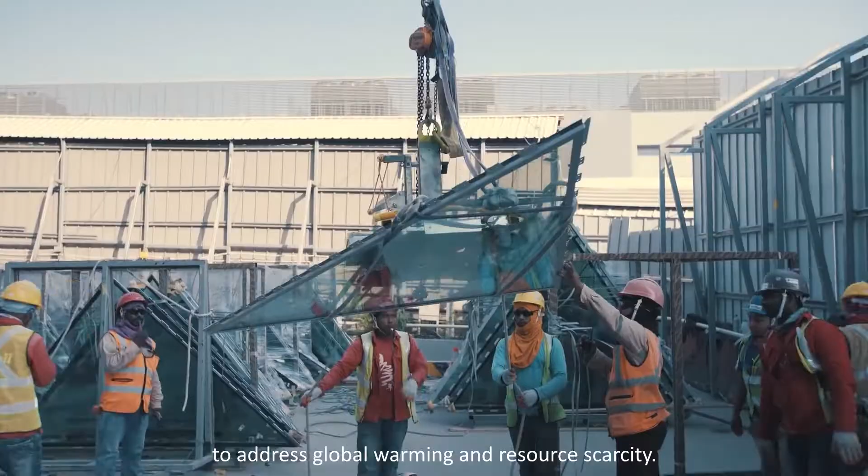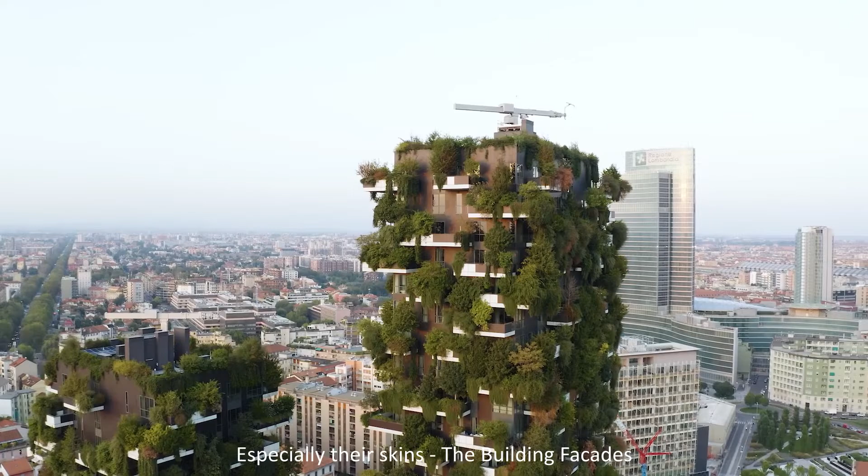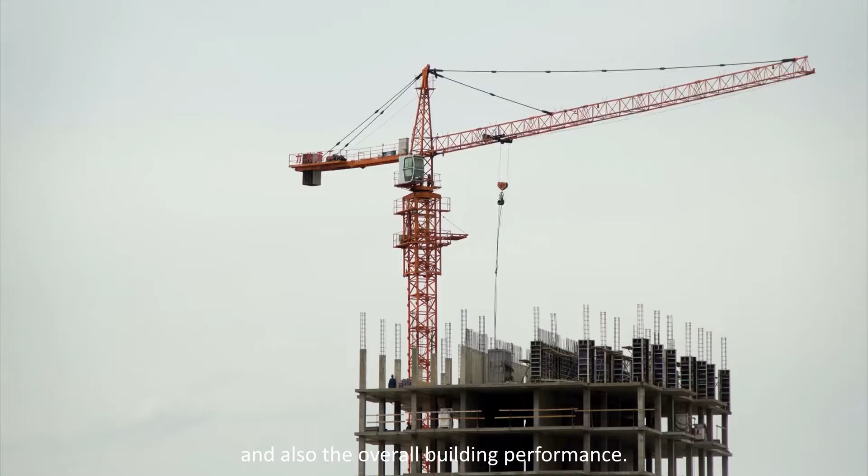Our societies need to actively strive for a sustainable future to address global warming and resource scarcity. Buildings play a crucial role in sustainable development, especially their skins, the building facades. Facades form the interface between the interior of the building and the outdoor environment. By having different materials, building orientations, shading devices, and advanced technologies, it helps optimizing indoor thermal comfort, and also the overall building performance.

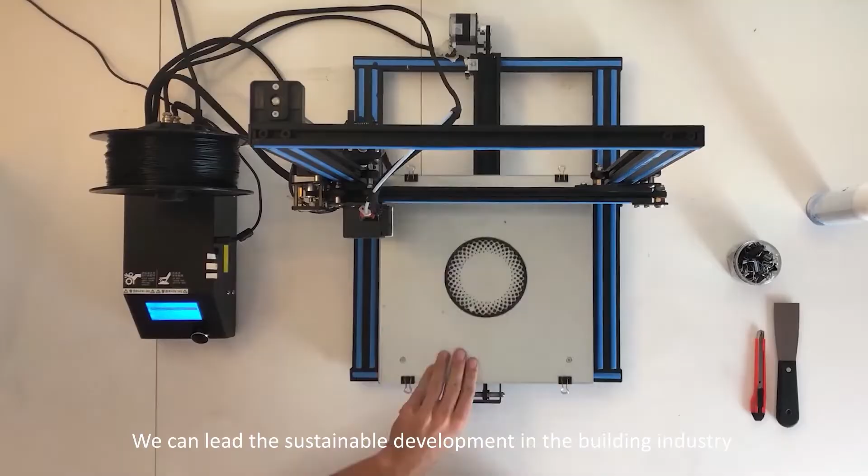Facade engineering is a new field of expertise that deals with climate and environmental challenges. We can lead the sustainable development in the building industry by using less energy and more adaptive facades, or even use facades to harvest energy. Now, let's talk about different shading systems in facade design. Advanced, of course. First, materials, glazing.

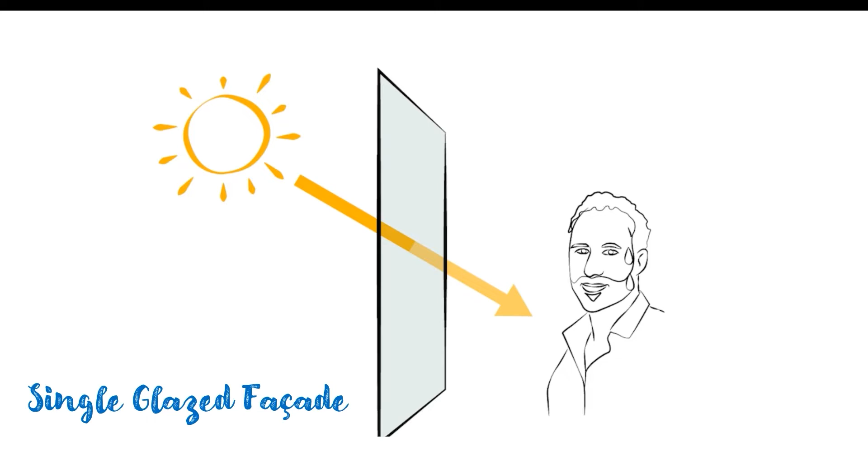In a single glazed facade, 90% of the light and heat energy from the sun passes through, overheating the interior. Mechanical ventilation and air conditioning increases CO2 emission. Glare is also an issue. It is estimated that the curtain wall market will continue to grow, so it is necessary to choose efficient glazing systems. But with so many different types of glasses nowadays, which one is the best? Don't worry. Just remember these three main parameters.

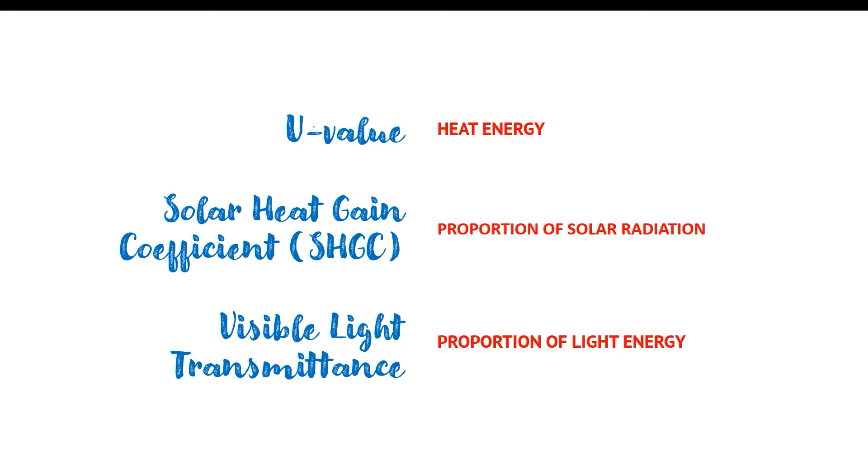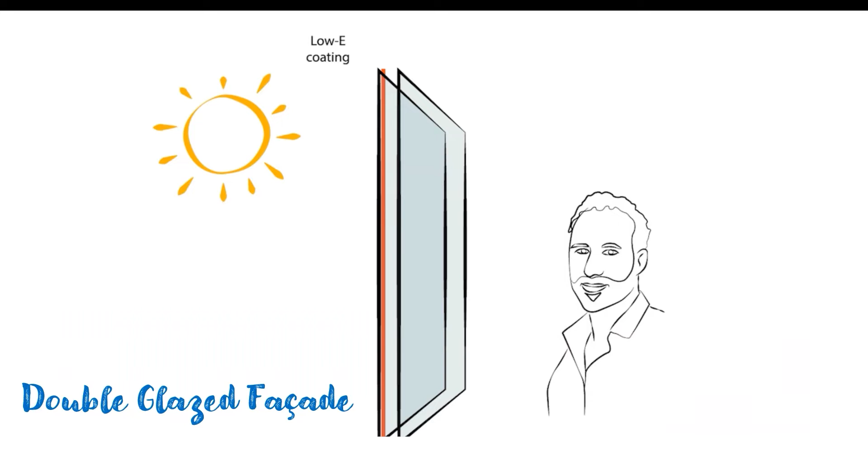Let's focus on number 3. Here are some terms you must know. U value, solar heat gain coefficient and visible light transmittance. These are their optimal values in a hot climate area. Double glazing consists of low E coating that reflects heat, reducing solar gain in a hot summer day. In winter, the inner coating keeps heat inside. The cavity in the middle can be filled with low conductive gas. A typical double glazing fulfills the optimal values.

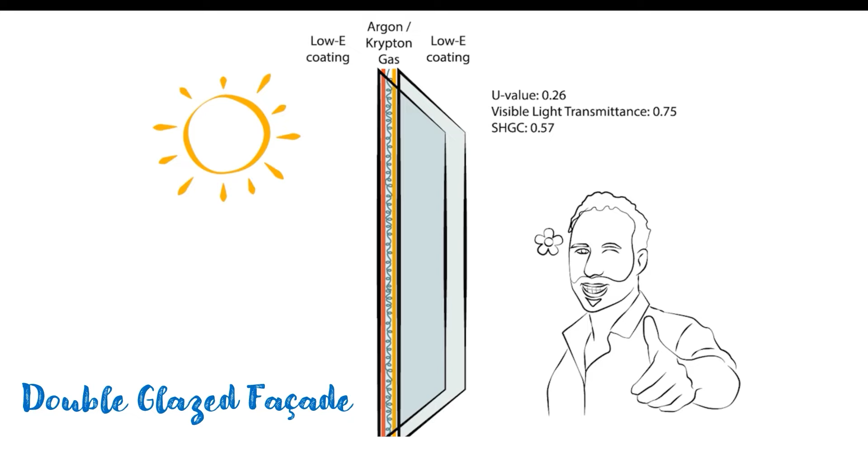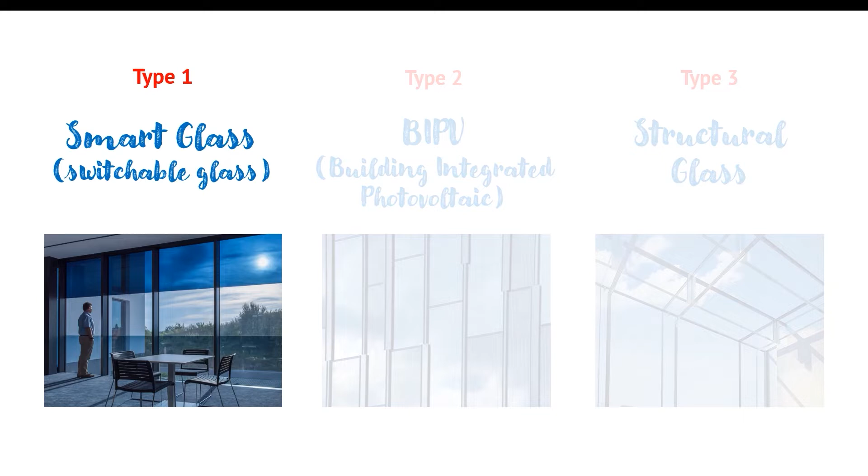Some new technologies include smart glass, which is switchable, BIPV, which acts as a transparent PV panel, and structural glass. 5 layers of ceramic materials are coated onto a thin piece of glass. Applying a small electrical charge causes lithium ions to transfer layers, making the glass tint. Reversing the polarity causes the glass to clear.

The Nestle headquarters office in Switzerland was renovated in 2018. Smart glass was used to block excessive heat and light at certain times, while allowing the office workers to enjoy the great view. To further improve the performance of glazing as a facade material, the future development will be the combination of these 3 trending glazing innovations.

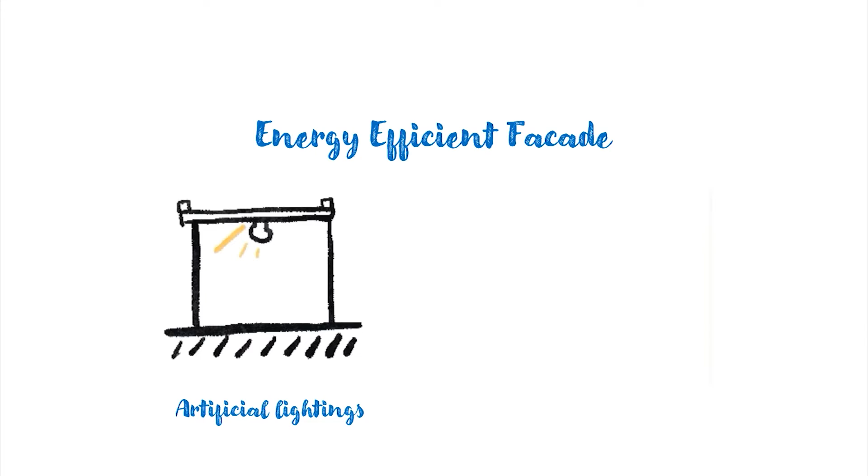An energy-efficient building facade can help reduce the reliance on artificial lighting and HVAC systems to create occupant comfort in the interior space. This can be achieved by reducing excessive solar gain and improved ventilation. In the past, thermal comfort solely relied on the thermal mass of heavyweight material such as concrete and brick walls. But in modern days, double-skin facades can be used to achieve high thermal comfort in lightweight building structures.

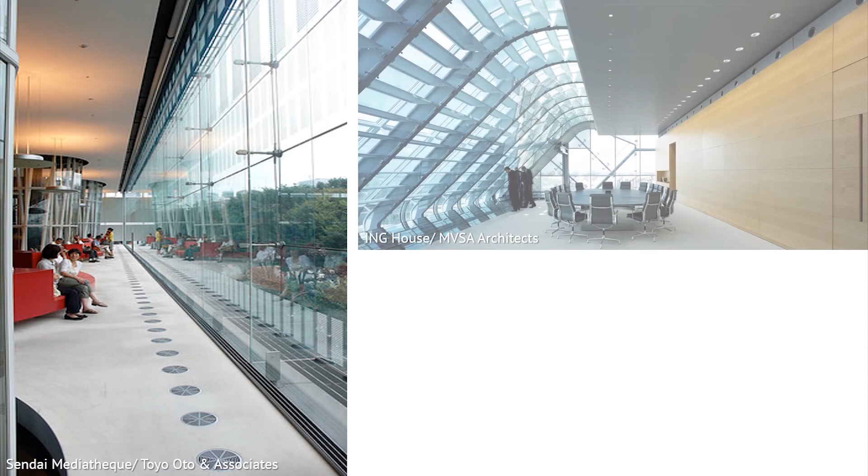Double-skin facade, short for DSF, literally means a facade system with 2 layers. Glass is usually used to allow sufficient natural illumination. The distance of this cavity ranges from 20 cm to a few meters. The air flows through this corridor, creates an insulation layer against extreme temperature, wind and noise, thus enhancing the building's thermal efficiency. The airflow can be both natural and mechanically driven and is applicable in different climates.

One of the most famous examples of this facade system is the Gherkin in London, UK. Designed by Foster and Partners, the building utilizes DSF to reduce its reliance on air conditioning and artificial lighting. Extensive use of glazing on the facade and light wells also enables natural lighting. The building uses only half of the energy consumption of similar-sized buildings. The tower is aerodynamically designed to reduce wind deflections and redirect wind into the facade system to facilitate natural ventilation.

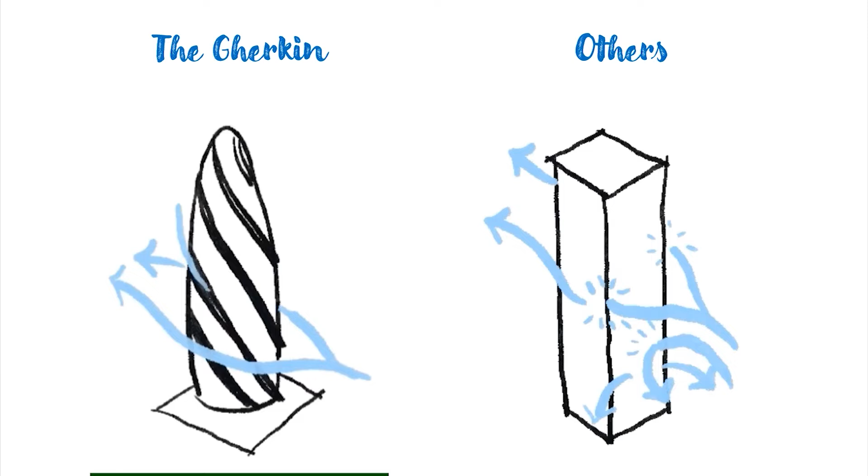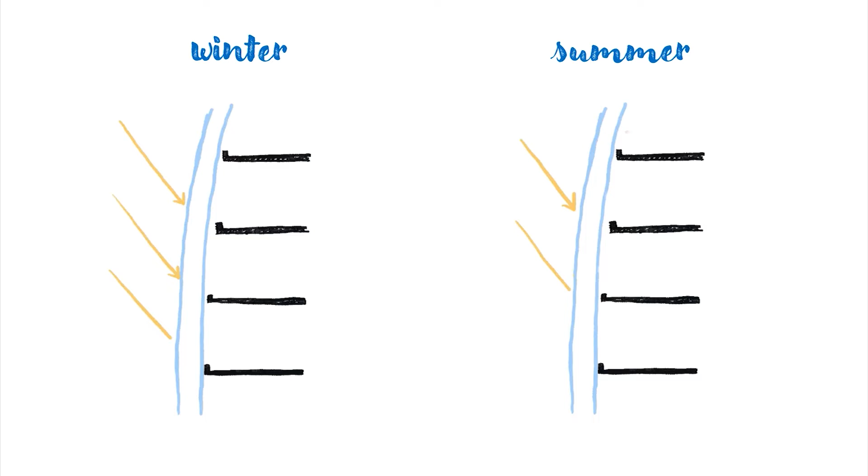The air between the double-skin facade insulates the office space through passive cooling and heating. Openable panels in the facade draw in fresh air. The air flows through the cavity and enters the office space through pressure differentials. In winter, the insulating effect keeps the building warm through passive solar energy. In summer, the outer curtain wall absorbs solar energy. Heated air rises through the cavity through stack effect and vents out of the building via openable windows.

The brise-soleil comes from the French word sunbreaker, that refers to the permanent shading technique ranged from simple concrete slabs and fins popularized by the Swiss architect Charles-Édouard Jeanneret, better known as Le Corbusier. There are 3 major types of brise-soleil.

The horizontal overhang works most effective in the southern orientation that protect the building when the sun reaches a highest level. Vertical fins work well on the east and west side in the morning and evening. The egg crates is a combination of horizontal and vertical elements that has a high shading ratio and is very efficient in tropical climates.

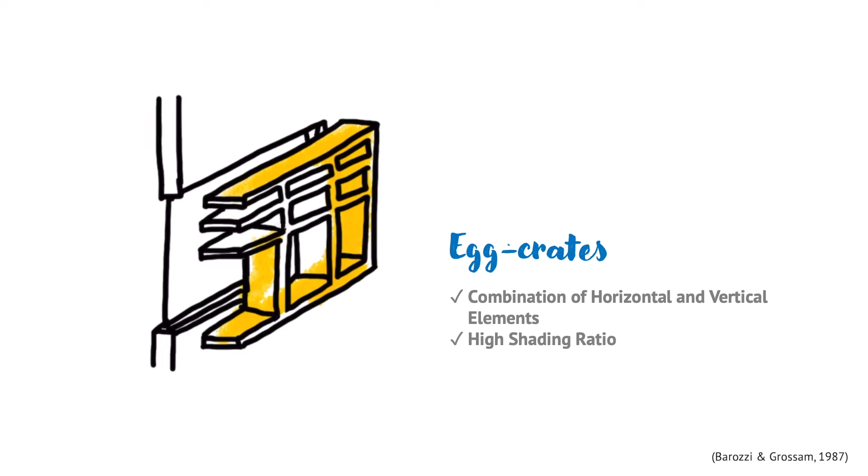The Unite de Habitation is the first project Le Corbusier designed after the World War II. It was ideally a residential building that can house around 1,600 people with mixed functions. He used a combination of horizontal and vertical concrete slabs as the brise soleil that they are associated to the loggias on the three sides, south, east and west, while the north side is a concrete wall that blocks the winter wind.

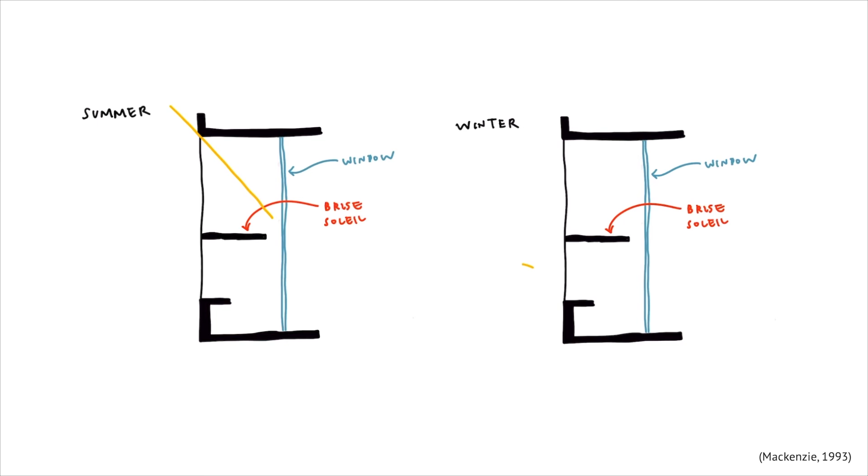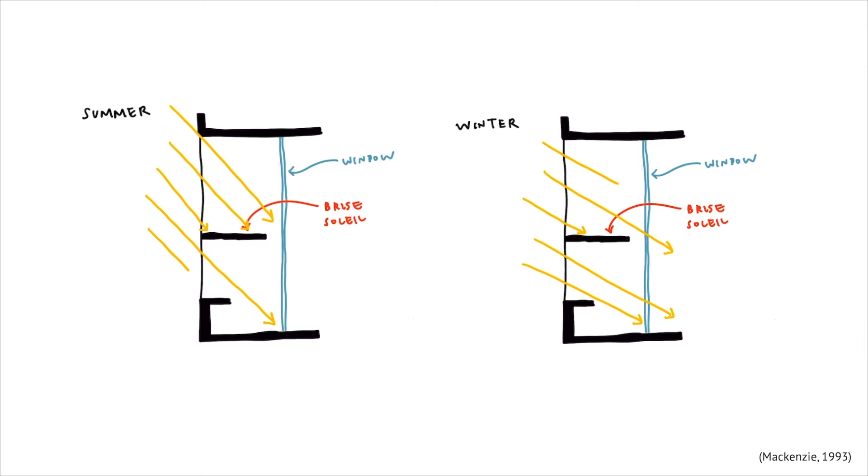In summer when the sun is high at noon, the system is effective to shade against the sun, and in winter when the sun is lower, it allows the sun to penetrate in. However, the sun shading devices facing east and west might not be as effective as those in south. It was tested that the west side allows a 2-hour solar penetration from 3 to 5 p.m. in summer and only 20 minutes of daylight enter the building in winter months.

In contrast, the south elevation allows up to 8 hours of daylight penetration in winter and completely shade from April to September. In other words, the orientation is important for placing the fixed sun shading devices, and this project would work more effective if it is rotated for 90 degrees.

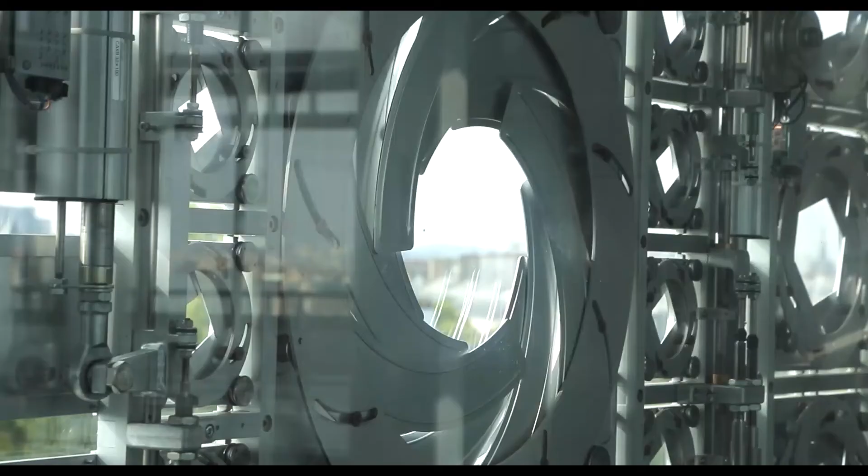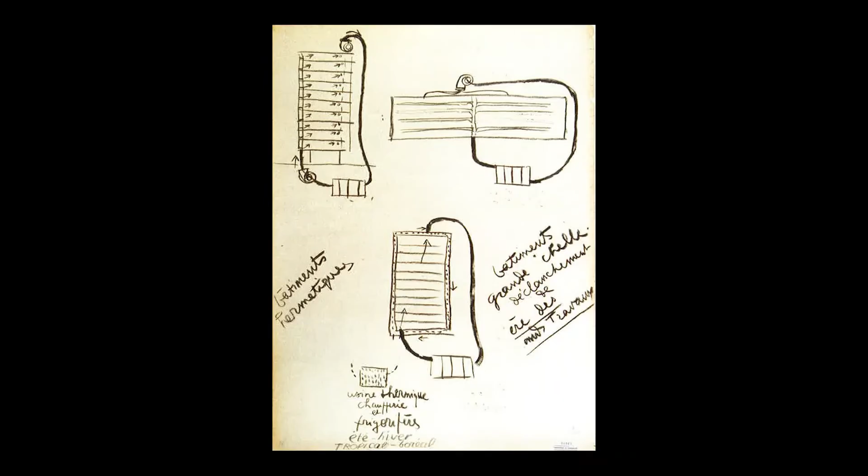Adaptive facade can be defined as a building envelope that contains thermal or visual properties that vary passively or owing to an active control during different conditions, ultimately to improve the building performance in terms of energy and comfort. A similar concept of mur neutralisant was proposed by Le Corbusier in the early 20th century. The idea is to create a microclimate within the building by circulating treated air around the double-glazed facade and achieving the result of warm in winter and cold in summer.

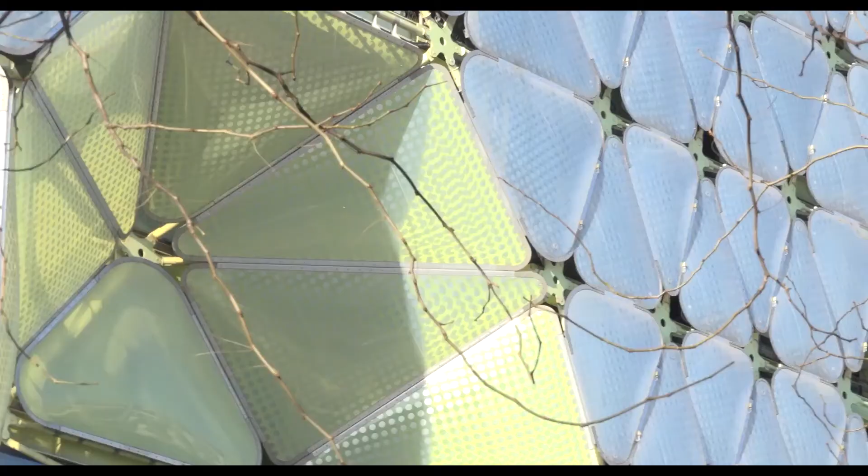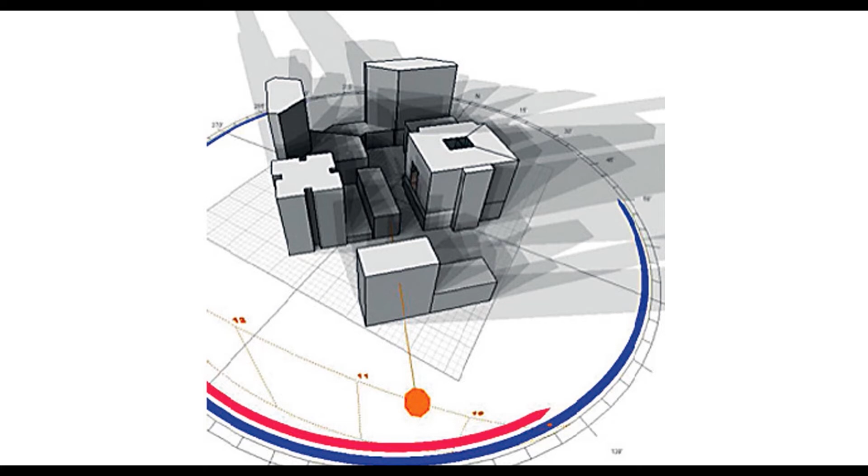A vast amount of data of the exterior and interior condition is essential in the design process of an adaptive facade. In the case of Media-TIC, a shade study was conducted, and it proved that shading devices are needed on both southeast and southwest facade. Also, an energy simulation shows that the facade system reduces 300 kilowatts of cooling power, indicating its great relevance due to the huge demand for cooling of 86% in the summer. There are two facade systems on the building.

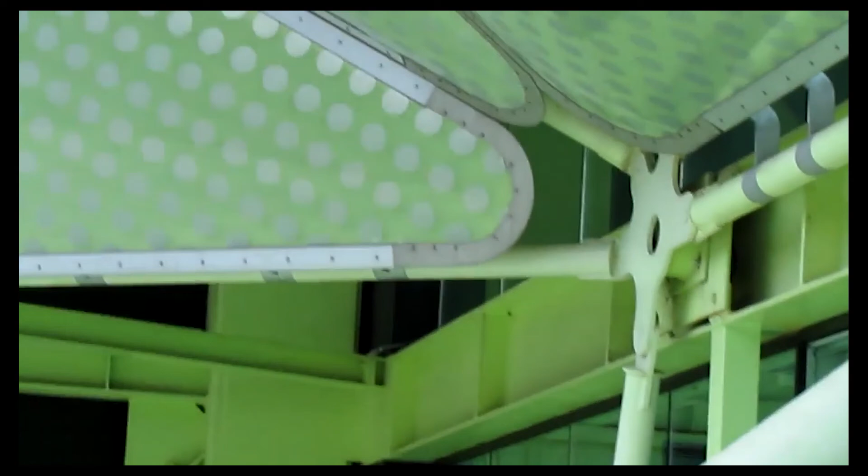One is a set of lighting control system that is formed by ETFE cushions at the southeast facade, which the material is recyclable and maintenance friendly. They are fabricated in 3 layers, and each layer is printed in an opposite pattern. When air is inflated into it according to the exterior conditions, the air pressure change will overlap the pattern and deliver an opaque effect to control the gain of sunlight.